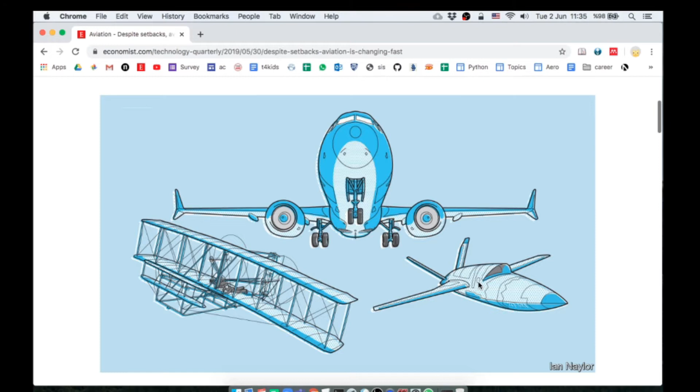Now, in this part of the future of flight discussion, we will have a look at the rebirth of supersonic flight. Faster than sound, supersonic airplanes could make a comeback. Three American companies are developing them.

On October 24, 2003, Concorde made its last commercial flight. It carried a full load of passengers, 100 of them, from New York to London, and it did so in 3.5 hours. It was able to make the journey so rapidly because its top speed was Mach 2.04, just over twice the velocity of sound.

In its day, Concorde—this is a nice historical background of supersonic travel—was a superb piece of engineering, but it was also a vanity project. What is a vanity project? We will learn it in the next sentences.

It was also a vanity project cooked up in the early 1960s by the British and French governments. So it's a government project, but a vanity project doesn't mean a government project. Issues like profit were ignored. This project was supported by the governments, and issues like profit and economic feasibility were ignored.

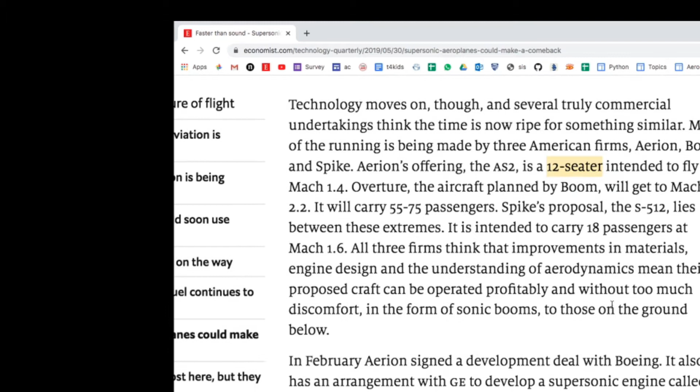Okay, let's have a look at these projects in a little more detail. In February 2019, Aerion signed a development deal with Boeing. It also has an arrangement with GE to develop a supersonic engine called Affinity, capable of operating efficiently both subsonically and supersonically. The plan is to attach three of these at a time to an airframe built by Spirit Aerosystems, a large manufacturer of airframe components.

So this is like a consortium: Aerion, Boeing, GE, and Spirit Aerosystems. All this will come to pass, Aerion claims, by 2023, the current target for the AS2 to take off. Not very far from now. We will be beginning to see if everything goes according to plan.

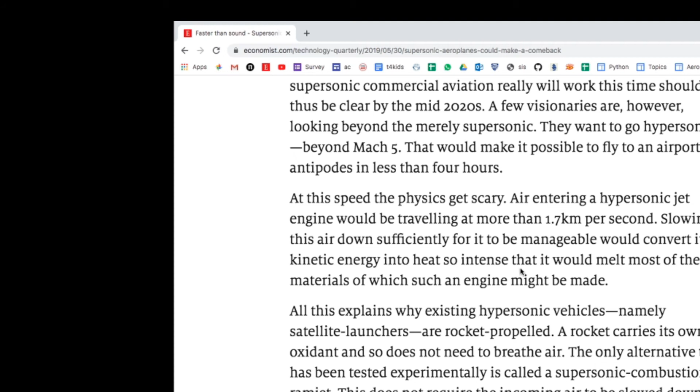At these hypersonic speeds, the physics gets scary. Air entering a hypersonic jet engine would be traveling at more than 1.7 kilometers per second. Slowing this air down sufficiently for it to be manageable would convert its kinetic energy into heat so intense that it would melt most of the materials of which such an engine might be made. Now this is a really scary speed. So about Mach 5, that is about 5,000 kilometers an hour.

This is really the speed one encounters in astronautics, not aeronautics. This is almost approaching the escape velocity or the re-entry velocities of spacecraft, which are of course designed for this extreme heat, extreme temperature built up in the vehicle. So you don't really want your large jet engine, or at least its turbines, to face this type of speed.

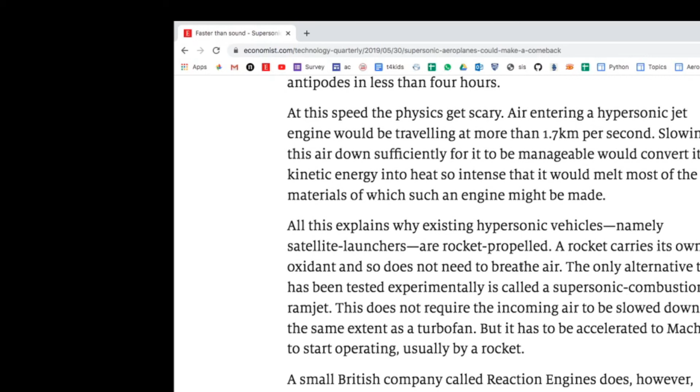So how can one make hypersonic engines then? The next paragraph tells us a little bit more about this point. All this explains why existing hypersonic vehicles, namely satellite launchers, are rocket-propelled. So these are rockets with no jet engines. They are rocket engines. A rocket carries its own oxidant and so does not need to breathe air.

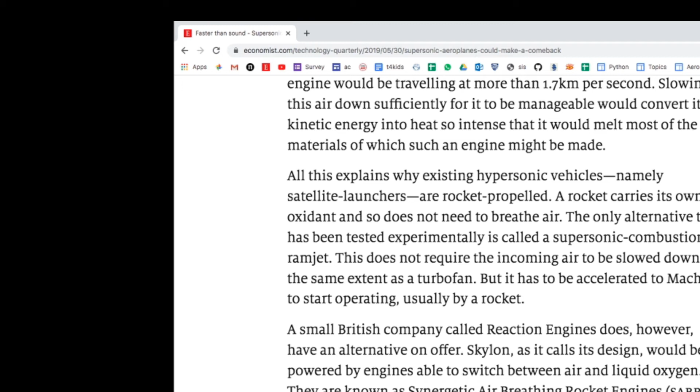The only alternative that has been tested experimentally is called the supersonic combustion ramjet. So this is an alternative to rocket engines that can push vehicles to hypersonic speeds. This engine doesn't require the incoming air to be slowed down to the same extent as a turbofan, but it has to be accelerated to Mach 5 to start operating, usually by a rocket. Unfortunately, this type of engine, called a scramjet, has to be accelerated to Mach 5 before it can start working.

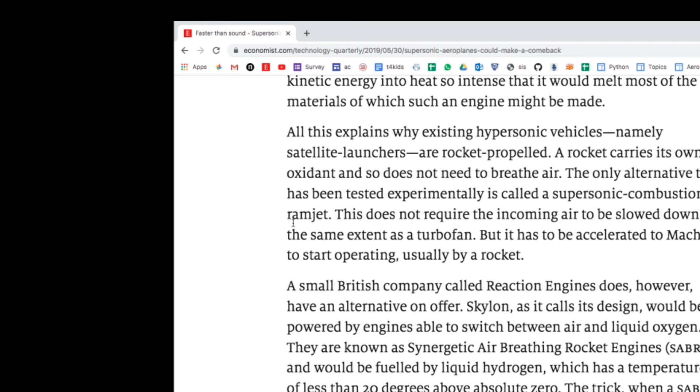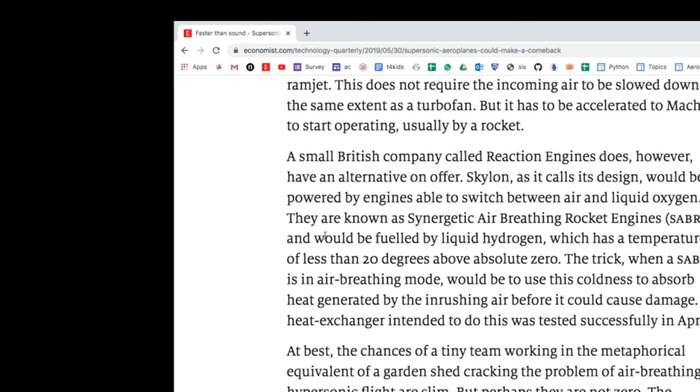Therefore, one needs a hybrid system in order to use a scramjet. A small British company is exactly doing that. But before that, I should show you what a scramjet looks like.

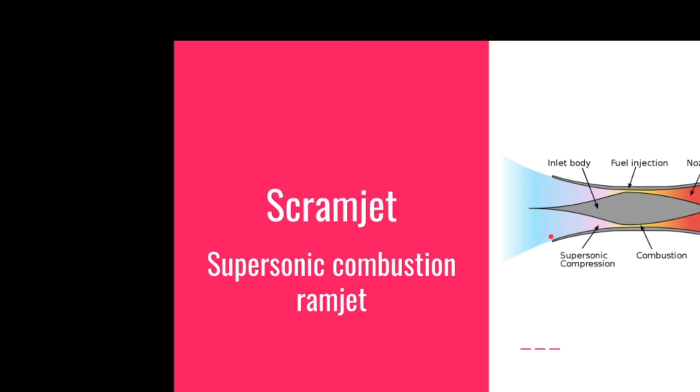So coming back, a small British company called Reaction Engines does, however, have an alternative on offer. Skylon, as it calls its design, would be powered by engines able to switch between air and liquid oxygen. It says oxygen here, but it should really be hydrogen.

They are known as synergetic air-breathing rocket engines, SABREs, and would be fueled by liquid hydrogen, which has a temperature of less than 20 degrees above absolute zero, so that is minus 250 degrees centigrade. The trick when a SABRE is in air-breathing mode - this is basically a rocket engine packed with a jet engine -

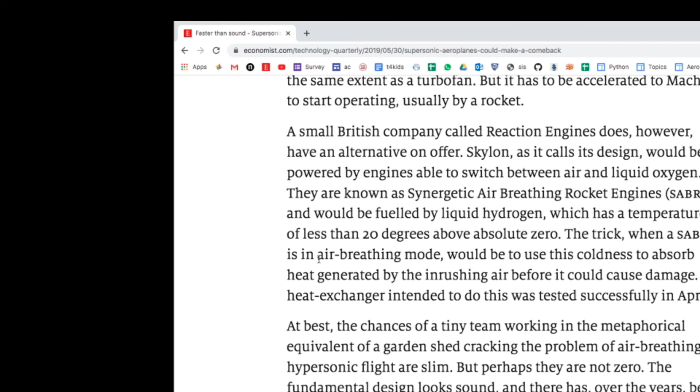the trick when a SABRE is in air-breathing mode would be to use this coldness to absorb heat generated by the inrushing air before it could cause damage. So they will also be using liquid hydrogen as a fuel and also as a coolant in this approach. A heat exchanger intended to do this was tested successfully in April.

So I have, this is the Reaction Engines Skylon. I have a video for you to investigate there. Also, I provided a PDF that shows the space shuttle.

The space shuttle achieves 5 Mach in just 3 minutes, and ultimately it arrives to 27 Mach for escape velocity.

Coming back, the article is actually evaluating this type of a hybrid engine, and perhaps not so optimistically, but by saying: at best, the chances of a tiny team working in the metaphorical equivalent of a garden shed cracking the problem of air-breathing hypersonic flight are slim. In other words, this is not a small project to be done in your backyard. This is the point the article is making.

So the problem is air-breathing hypersonic flight. If you want a challenge, this is a challenge for you. Air-breathing hypersonic flight - that is not an easy problem to solve.